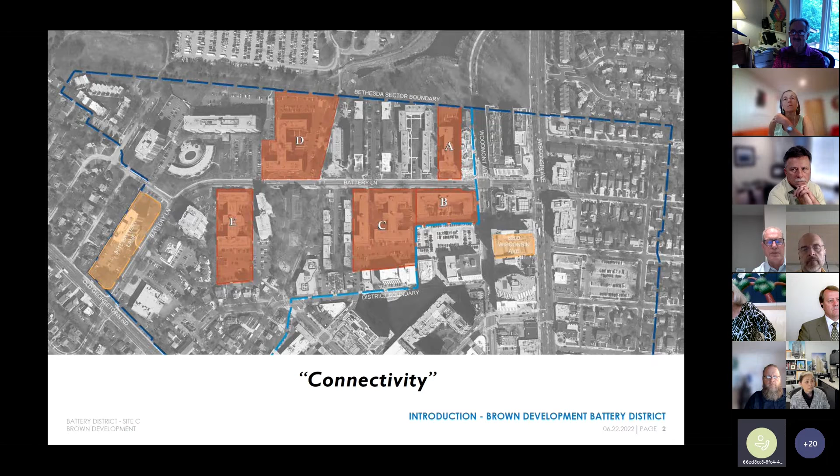In our sketch plan, as Grace said, we really focused on strengthening the residential character of the neighborhood, looking at the unifying elements being Battery Lane and the trolley trail, and looking to improve connectivity. When I say connectivity, it's certainly physical connectivity—accessibility and mobility, improving pedestrian safety and the pedestrian experience, and providing a two-way cycle track separated from vehicle traffic on Battery Lane all the way from Woodmont to Old Georgetown. So physical connectivity, very important.

Social connectivity is just as important. None of our buildings today have any facilities for meetings, social interaction, or recreation. So as you'll see in our site plan, we propose to remedy that with a lot of facilities and spaces, both interior and exterior, to encourage social interaction.

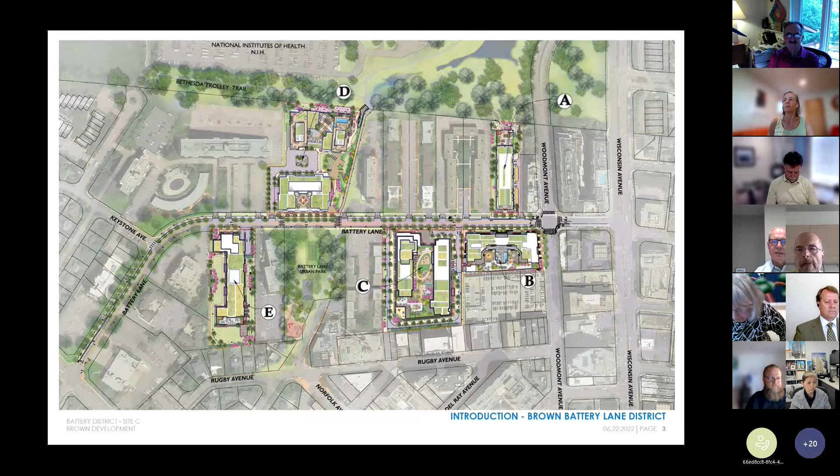And finally, environmental connectivity is very important. We want to provide stormwater management, energy-efficient buildings, and significant tree canopy, all to provide for environmental connectivity in the Battery Lane neighborhood. So with that, I'll just go through the next image.

Just quickly, some changes and updates. The sketch plan to the left had several curb cuts from Battery Lane. We've consolidated those into just one curb cut, again improving the pedestrian and bike user experience on Battery Lane. We really tried to remove what was a ring road—the amount of asphalt that encircled the site—and replace it with green and tree landscaping. Our design team will get into that in some detail. So all of that, we think, really helped improve the site.

And then there are some changes in massing, which will be described by our architecture team, which also, I think, are significant improvements. All right, next slide.

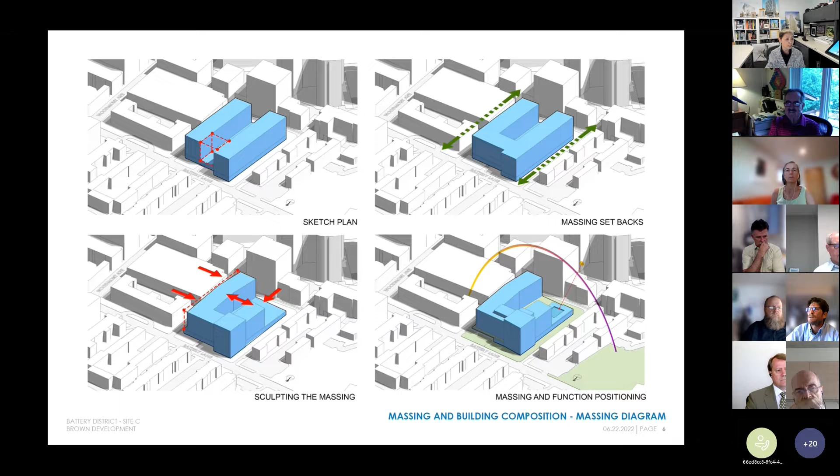In addition, it allows us to provide residential amenity outdoor space for the residential building and also for the neighbors, because we set back typically on all sides. We've really been able to do that successfully with this project. Next slide, please, Bob.

So this slide shows that at 120 feet tall, building C is our building. We are compatible with our neighbors when they develop in the future, as they will also have a similar allowable height of 120 feet. So you can see we fit pretty well within the neighborhood.

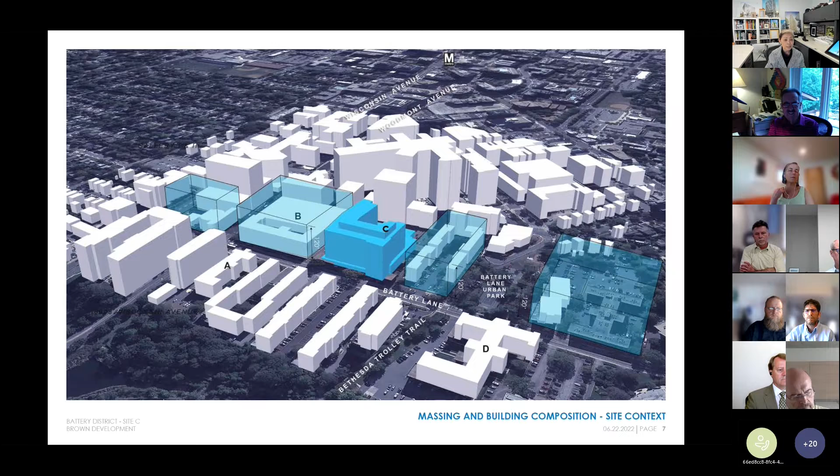And for the next slide, I'm going to pass this along to Trini, who will be discussing the landscape and urban design aspect of the project. Good morning, everyone. Trini Rodriguez from Parker Rodriguez.

I think both Doug and CT have described the major moves of how this project has evolved, which we think has really improved the public realm and the relationship to the context. You've seen this slide before, but I want to highlight the importance of the streetscape improvements we're incorporating as part of that frontage. It's very important how the building relates to that streetscape, how it fits within the context.

I think you all know we've been working with staff, especially to move the drop-off that used to be in the front to the side. We still want that because it's activity that's part of that energizing element in the streetscape—you can see it from the street, but it becomes more of a plaza space that engages both the sidewalk and the interior.

Along that frontage, you'll see in a minute how we're treating that more as a front porch, an extension of the building, engaging the streetscape and providing a lot of porosity internally into the site—views internally into a courtyard that engages both the residents and the passerby.

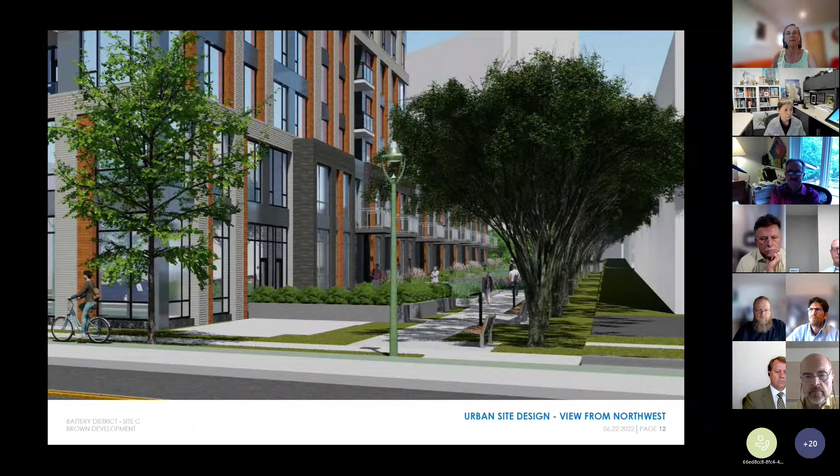Next, we have a close-up on the next slide. Yes, so this shows the building stepping out, the access to the two-level units. You can see that, and then we're providing this walkway with seating, lighting, and trees and plantings to make it a lush experience.

So this will connect straight north into Battery. And if you turn left, that goes around the building, and you'll see on the next slide how we're creating a special node in this space with an open green lawn for casual play. You can see how this engages with the building.

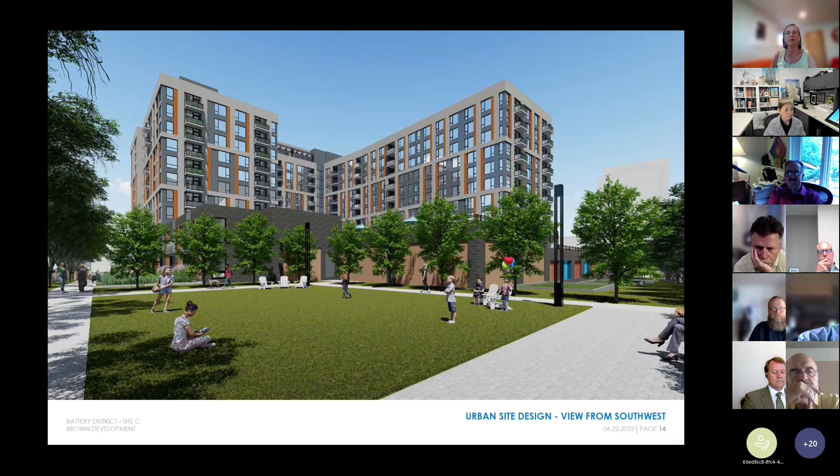So the second level courtyard that I mentioned before has a lot of exposure to this rear end, so you'll have a lot of eyes into this back area. This is the node that I mentioned before. If you move to the right, going east, this will connect to the eastern pedestrian connection. It'll be lit and has a number of units and activities facing it, making it safer and activated.

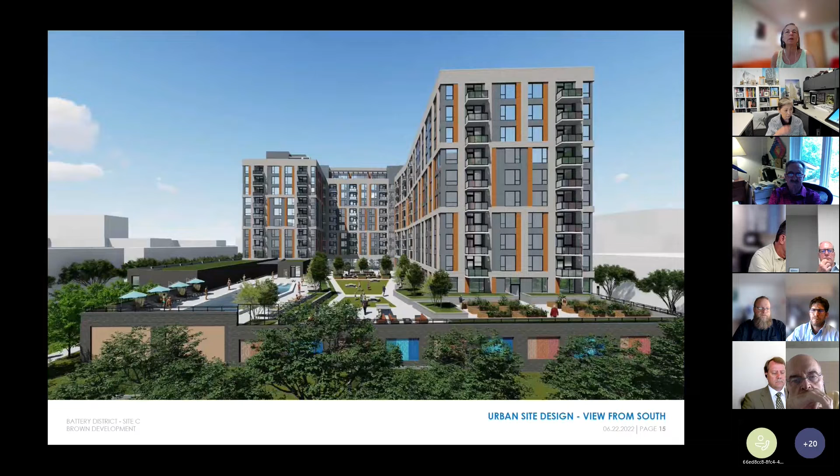Next. So this is a view a little higher up showing the private courtyard. Again, these will provide amenities for the residents. These are private, but this is a building that will have a very extensive offering of amenities, between the pool that you can see on the left-hand side that overlooks that green area and the pedestrian loop.

We also have a central area with green. There is grilling, there's games. There is also, to the right-hand side, a vegetable garden and a variety of seating. You can see how the massing of the building stepping back on the left-hand side creates the opening and the stepping of the units, which CT will explain more, but to the left side you'll see the units coming up, and then the larger volume on the right.

So now I'm going to take you to the other corner. This is the eastern corner, the pedestrian connector on the right-hand side will take you all the way up and then to the north on Battery to connect to Battery. On the south along the police station, there is an existing sidewalk. So this connects exactly at that point, and it provides an immediate connection into the Rugby Avenue district, again sort of a city node.

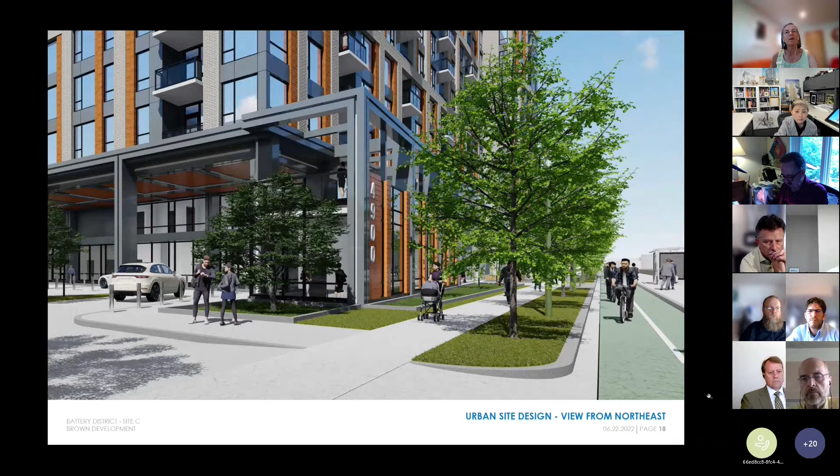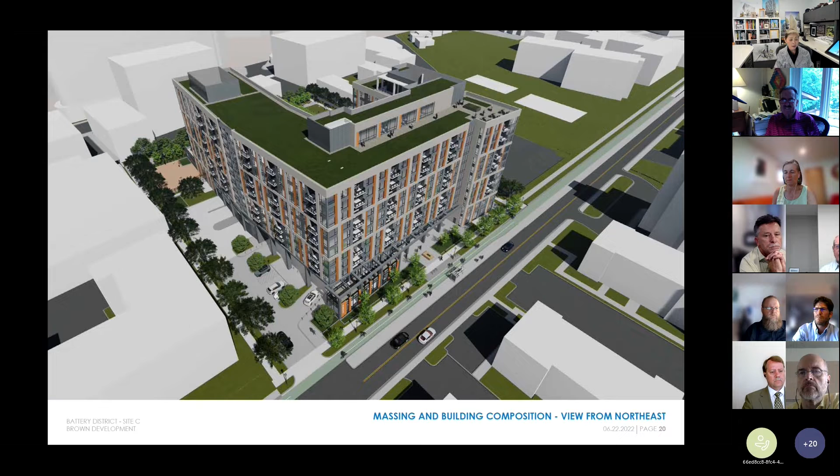This is the view looking from the northeast corner of the site, and you can see the curb cut from Battery Lane, the single curb cut entering the site, and how we tuck the vehicular drop-off area under the building off this driveway. The driveway continues south to access our loading and parking garages. You can also see the vocabulary we treat going around the building, because there's no real rear elevation to this building, so we apply the same treatment consistently throughout the building massing.

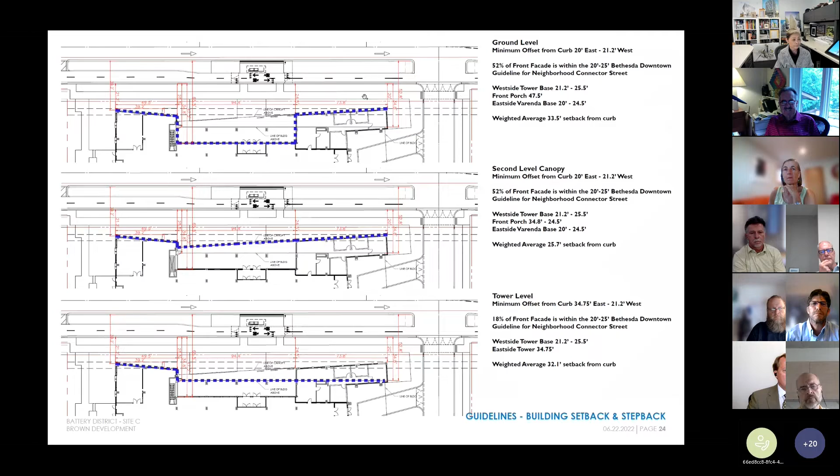For the record, Bob Graham with Rogers Consulting.

As City said, the setbacks are kind of unusual. As Trini described, we have a recessed 2-story lobby. So when we look at the placement of the building, we have a 21-foot setback at the western corner, a 20-foot setback at the eastern corner, and a 2-story recessed entry lobby, which is actually set back 47.5 feet from the cycle track curb, or approximately 65.5 feet from the vehicular curb.

This results in about 52% of the building's front facade at the ground floor and second level being within the 20 to 25 foot Bethesda build-to area. The average weighted setback for that 2-story space is about 33.5 feet from the curb on average.

As we move up to the second floor canopy or third floor plate, we again maintain that 52% being within the 20 to 25 foot build-to area. As described, our canopy recesses back from the main tower above, 17 feet on the east, transitioning down to 7 feet on the western portion, and the tower element maintains its plane throughout. This yields an average weighted setback of about 25.5, 26 feet on that plane.

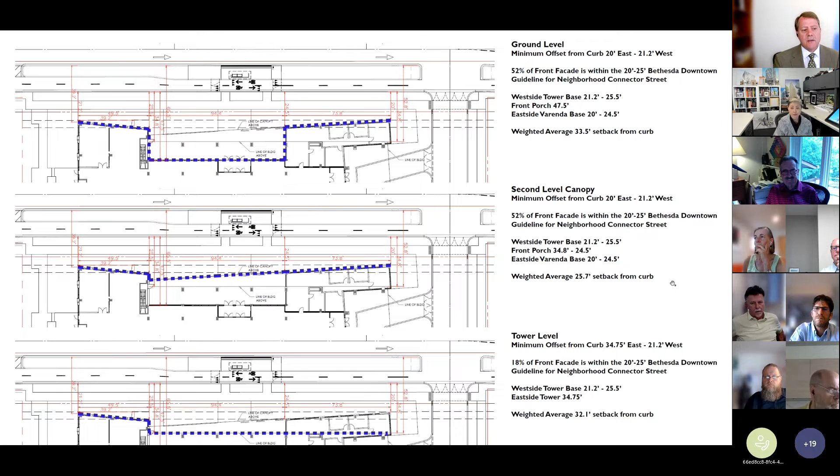When we move into the tower above, starting at level 3, we again maintain our iconic tower element at 21 feet. However, the main body of the tower is set back 34.75 feet from the cycle track curb, or 52.8 feet back from the vehicular curb. This gives us a weighted average of about 32.1 feet running across those spaces.

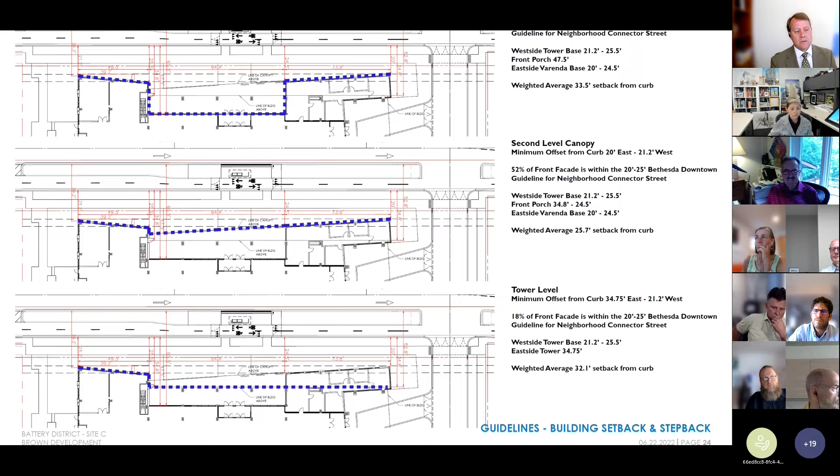Okay, back to City. Thank you.

Let's talk about the base building placement. What we've done for this project is create the interior and exterior function spaces and the facade to create an activated street wall along Battery Lane. We accommodate a lounge area at the building front porch, and we also incorporate a veranda on the second floor as part of the base building design. The base building scale and design in tandem with the landscape design really elevate the pedestrian experience along Battery Lane.

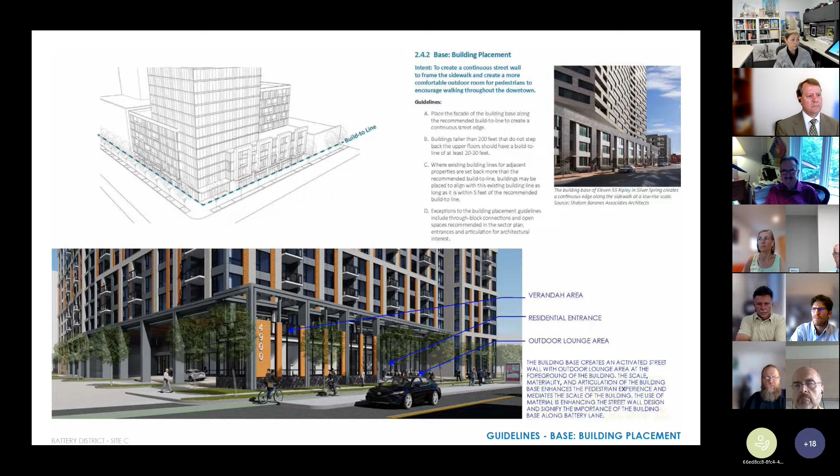To continue our street activation, this slide shows the architectural elements we are incorporating with the building design. We are providing a varied landscape design and furnishing, and the building base is designed in tandem with the landscape design, so it's responding to each other. We also incorporate an outdoor veranda for people to hang out on the second floor, which really creates a lot of energy and excitement on the building facade.

In addition, we have a metal trellis on top to really define the building base. The glass wall you've seen earlier creates transparency for the lobby, encouraging visual interaction from the sidewalk into the lobby. The balconies on the tower, with multiple layers of building material throughout the facade, ensure activation of the building base and facade along Battery Lane.

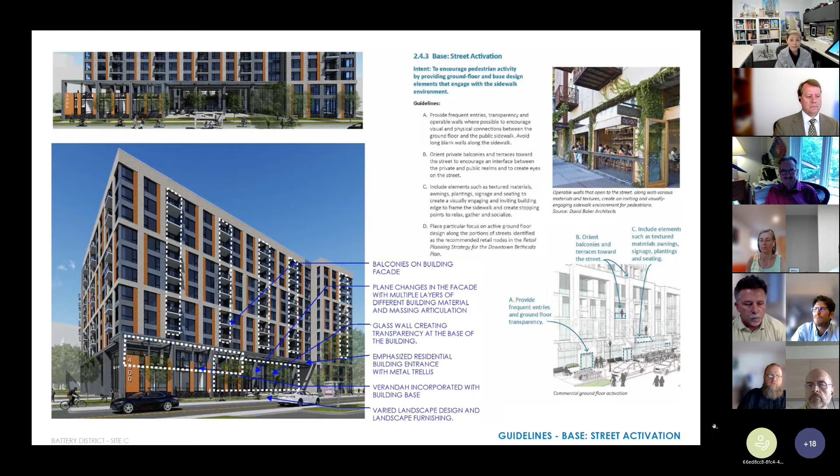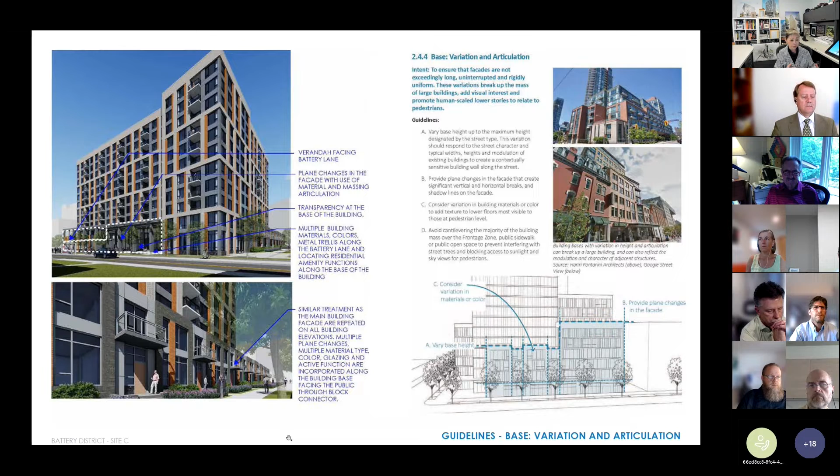All the features discussed under building placement and Battery Lane activation are also consistent with the building base variation and articulation, which doesn't stop at Battery Lane. We bring this to the west and east of the facade and also behind the building. If you look at the slide at the bottom left-hand corner, it shows the two-story apartment articulation and how the variation from the rest of the building elevation is brought in here, allowing activation and making the pedestrian experience at the through-block connection a bit more energized and interesting.

For corner treatment, we are emphasizing the northwest corner of the site with special corner treatment to the massing, where we bump out the massing a little and angle it slightly with vertical design expression. What this does is tie all the design elements together and anchor the building to the ground.

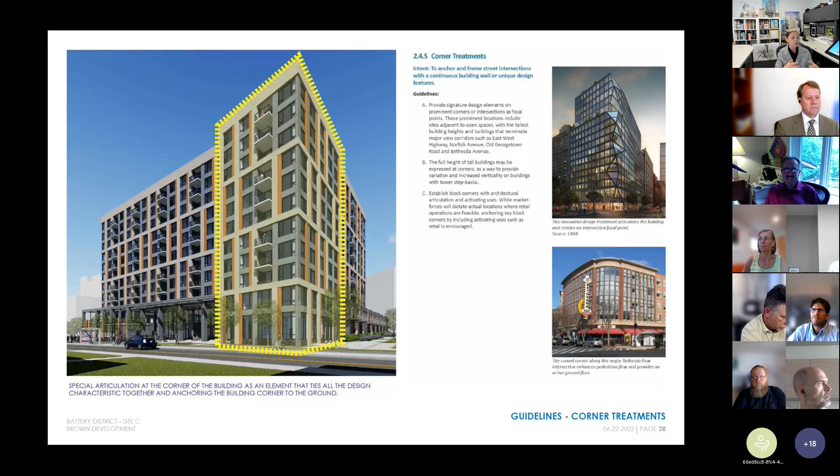We already spoke about this earlier, about how our building steps back significantly from the neighborhood to allow these amenity spaces on the south of the building, and also how we step back at the base of the building along Battery Lane.

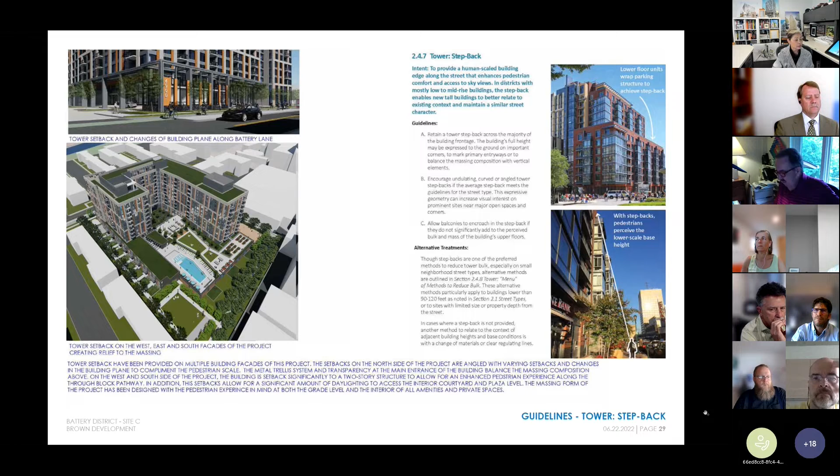In terms of compatibility, we are compatible with the neighboring building, as it's an important concept for successful integration with existing context. We are compatible in terms of using the same building materiality, color palette, and texture. If you look at our building design, we have a very similar composition of facade treatment, with larger glazing at the base of the building to allow this visual connection to the pedestrian. This is also most characteristic of the building that WDG has done at the Battery Lane area.

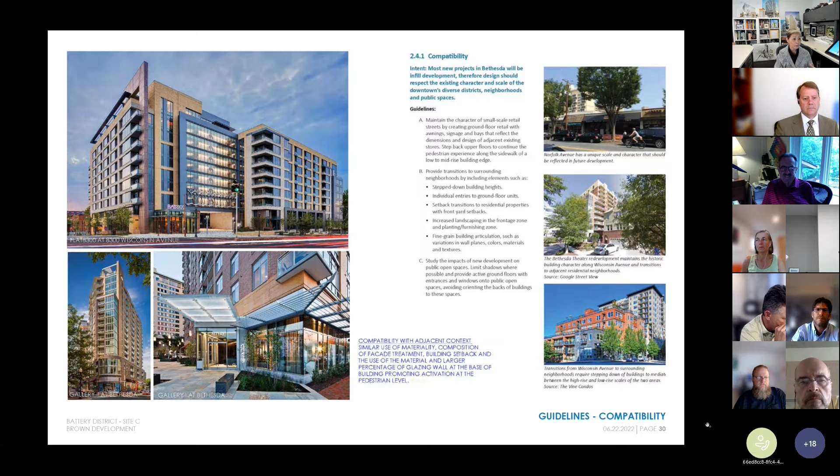This slide shows our building providing a transition with the surrounding neighbors by stepping down on all sides.

So the purple color, for instance, is where we locate the two-level apartment, and that will have the individual entry into the through-block connection.

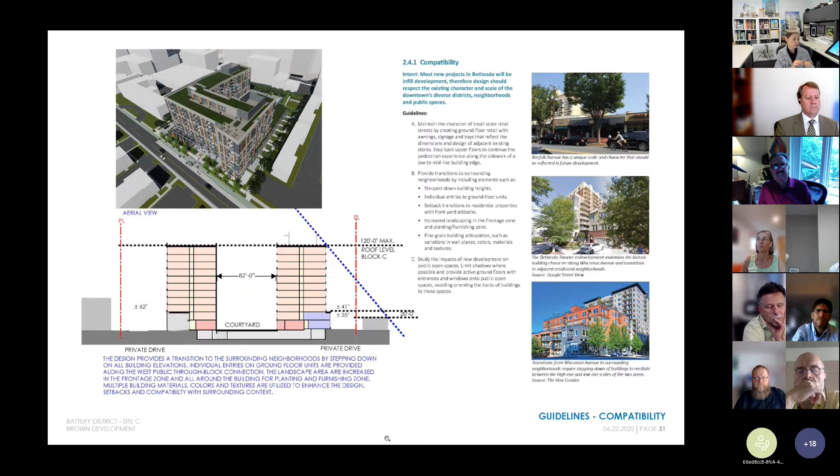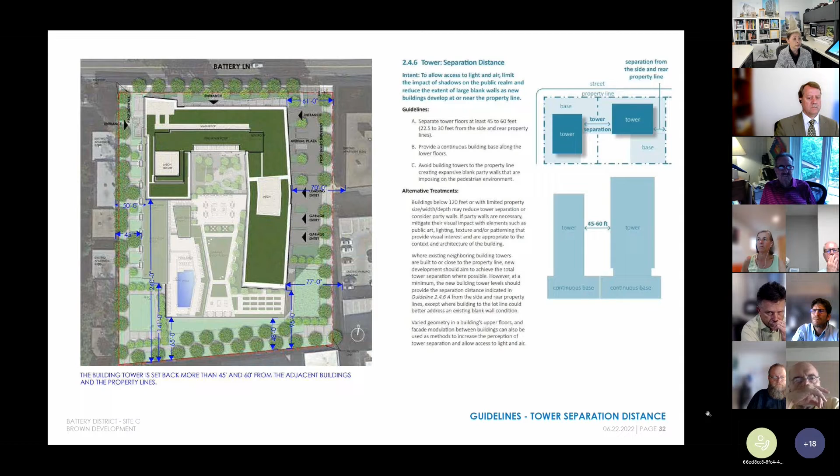Tower separation distances - I think we satisfy this requirement. We exceeded the minimum requirement of 45 to 60 feet. In fact, we provide more significant setback for tower separation distances: 61 feet in front from a property line, at the back a minimum of 48 feet, and at the side about 45 feet minimum.

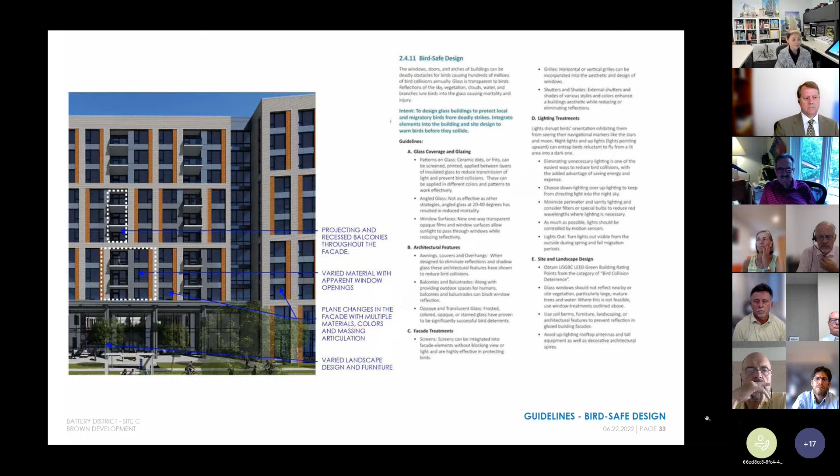For our final slide of the building, I want to walk you through the ground floor plan to emphasize what we are doing to create an interesting base experience along Battery Lane. If you look to the east of the site from the shared driveway, we tuck the vehicle drop-off area into the building, so it's hidden from the pedestrian.

If you're walking up and down Battery Lane on the sidewalk and stop in front of the building, you'll see a transition area with an outdoor porch. You can see the transparency of the glass two-story lobby volume from inside, which really energizes the building. What's unique about this design is our ability to bring the courtyard down to the same level as the lobby, so even standing in Battery Lane, you can see through those transparent glass walls to the greenery we're providing.

And because the podium is pretty low, you can actually see past above it to all the residential amenity we're programming on top of the building parking podium. We're also putting energized residential amenity along Battery Lane and around the facade, with residential units on the west engaging with the through-block connector. This means the space will be used, lit, and people will be hanging out and having fun there.

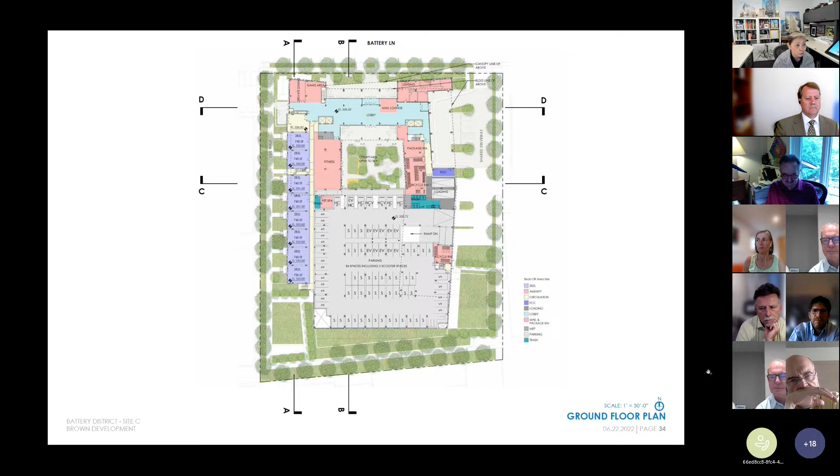That provides the physical and visual connection to Battery Lane and really makes this building part of the whole picture, where we're trying to create connectivity to the neighborhood, to the community, and to the master plan. So with that, I'm going to pass it along to Doug to conclude our presentation, and thank you for having us today.

Yes, this is Doug Wren. Thank you for your patience in hearing our story. I hope you'll agree that we've really tried very hard to achieve our overall vision for Battery Lane. We want to strengthen the residential character of this neighborhood, provide free connectivity, and contribute to the overall quality of the experience of being on Battery Lane. With that, I'll close, and we are eager to hear your comments and questions. Thank you.

This is Chow Joy. I think overall the site plan has a lot of improvement compared to the previous version. There's strong connectivity throughout the site, and the layout and geometry design is great. I do have a couple questions regarding the northwest corner - there are two patio areas that somewhat interrupt the green panel along the sidewalk. Can you explain what those pavements are for? Is it for outdoor retail spaces?

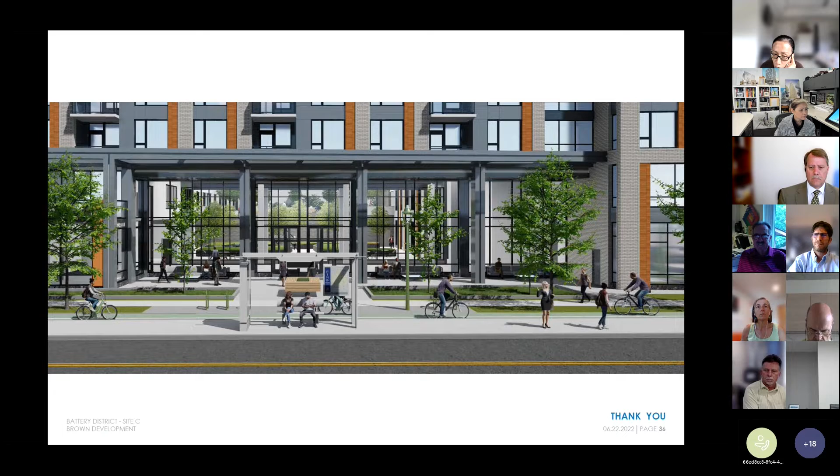If you go to the site plan - yeah, at the top there are two pavement areas. Is that a way to create a continuous green panel to have more trees planted in this area, to have something even stronger? Unfortunately, the two gray areas you see here and here are actually utility services, electric services for the building. There is an engaging patio off the lobby that engages the building and provides entry from the west side as well.

So is that a way to shift that utility pavement area or space elsewhere so that we have a continuous green panel along Battery Lane? Because right now it looks quite nice along the entry. We can certainly work with the utility companies to see what we can do. Okay.

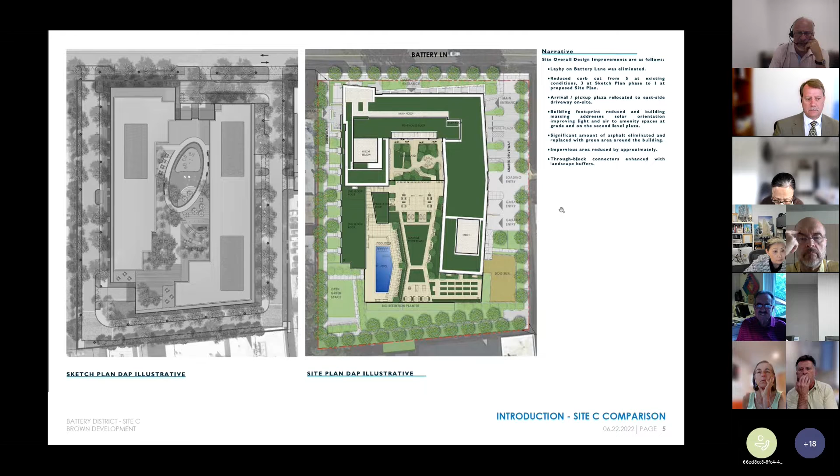I have some site comments and building comments, so I don't know which you want to go through first. We're on the site, it seems. One question I have - this is Paul Mortensen, by the way - on several of your drawings, I think page 23 was one of them.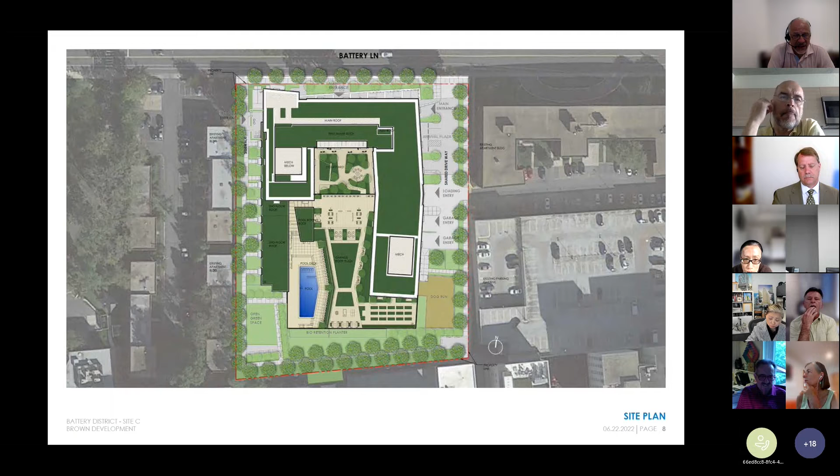It shows the cycle track, and then a planting strip. Is it this one? Yeah, there it is. So it shows the cycle track, it shows a planting strip, it shows the sidewalk, a planting strip, a cycle track, and then another sidewalk.

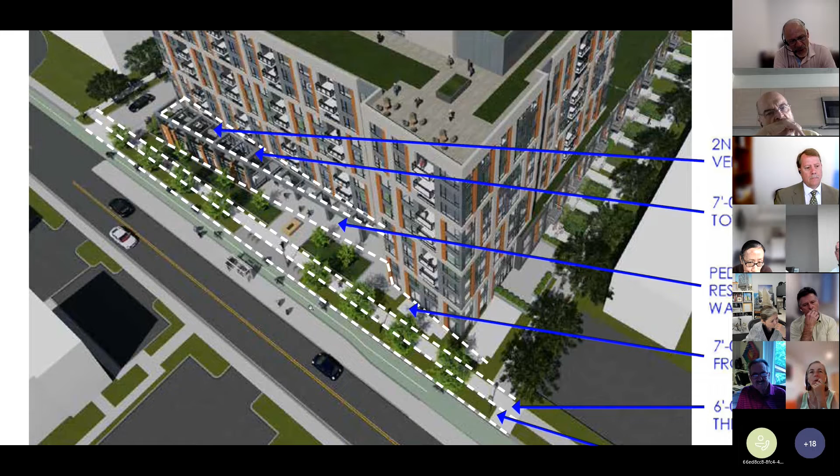There will be a hardened median in between the vehicular travel way and the cycle track in front of the building, and that will end at the property line. Beyond that will be striping. We're working with DOT, or attempting to work with DOT, on what the materiality of that hardened median will be. Obviously, within the bus stop area, it will be a hard concrete surface. Beyond that, we're attempting to get the ability to do grass or low-level planting, something to soften it further.

We're very limited on what we can plant in that area due to sight lines, but also due to utilities that happen to be underground in this part of Battery Lane. Ideally, it would be nice to have trees between the cars and the bikes to give a little more protection and shade, and to make the street look narrower so cars drive slower. We would love that, but there are water lines and electric lines within that zone that prohibit us from putting trees in there.

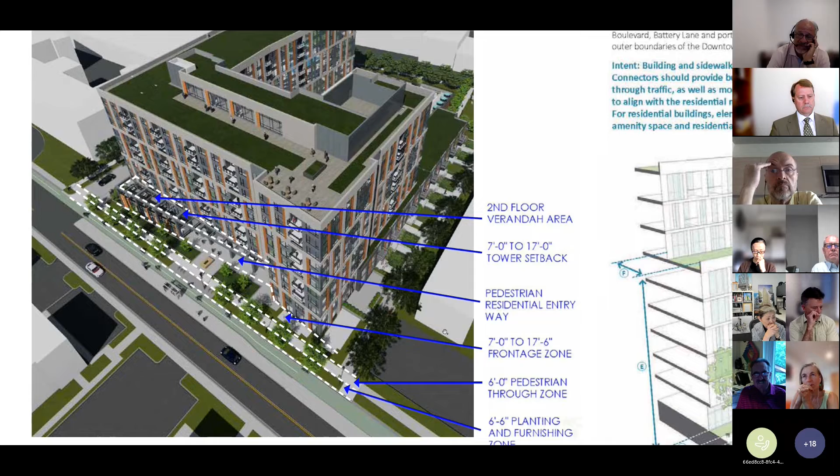So we have not - these were going to be kind of private community gardens, so we have them at that level. Down at this level, we wanted to have something that would still feel very public, that felt like the building was internalizing some of those uses. So for now, that's where we have them, up at the top.

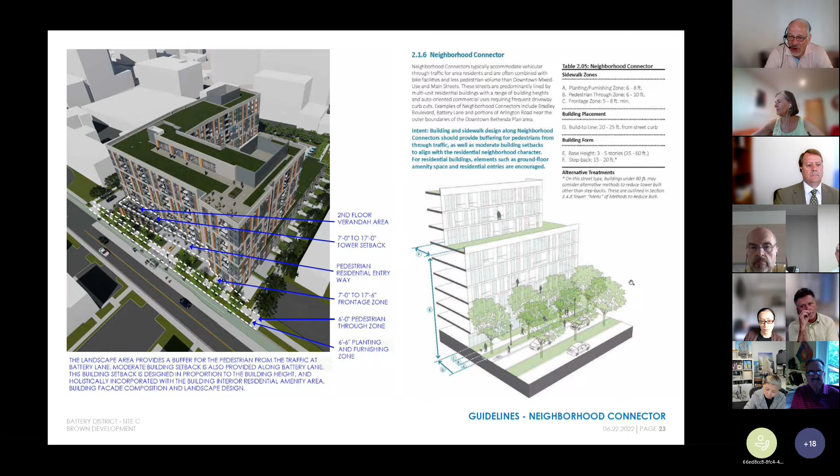Yeah, the reason I'm asking is I'm very concerned that the back of this building has just been sort of left for, unfortunately, probably people you don't want back there, for all sorts of stuff I think can happen in that back because there's no activity back there. And not only that, but it's a blank wall - the entire width of the building facing that back.

I think this is something, and this is like a bigger discussion, for this side of Battery Lane, because the lots are so deep. There's no alley back there. On the north side of Battery Lane, on the back, we're putting in a public pathway that goes the entire length - that starts to link all these buildings and create kind of an energy back there, so people are going to be back there and things are happening.

On this side of Battery Lane, I don't see what's going on in the back, and I think it's going to cause a problem here, and it's going to cause a problem when you go further west on the next building in a later phase. It's going to be the same problem - a back without any activity or use, any openings that give some sense of eyes on the street or eyes on the park, just to secure it. So I'm trying to figure out what you're going to do back there, because I don't see anything ever happening except the wrong types of things.

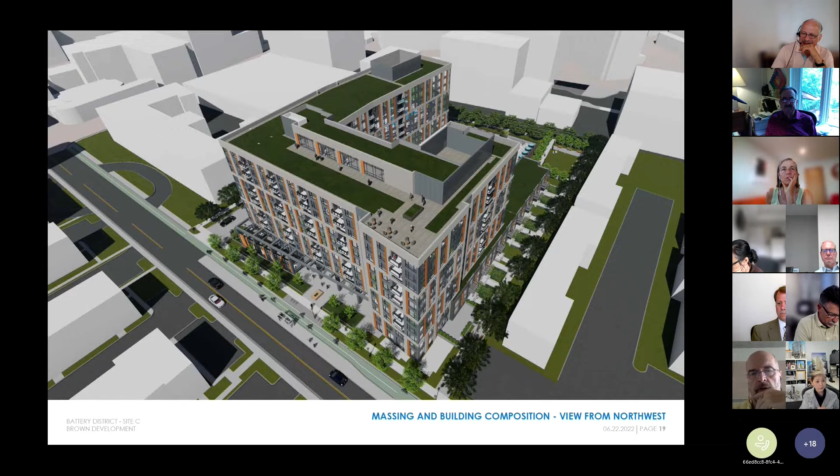So to answer that question, we did look into incorporating something at that part of the building, but what we've done here is create an outdoor area, and we don't want to block the view because the view to the north is pretty spectacular. So we wanted to focus and use that area as an outdoor sitting space for people to hang out. We tried different things, like putting in a trellis and stuff, but at the end of the day it looked tacky and like an afterthought. So we decided that by not having it at all, it gives a nice cap and top to the building, so it blends into the sky. Just repositioning the massing at the corner itself allows us to articulate that corner.

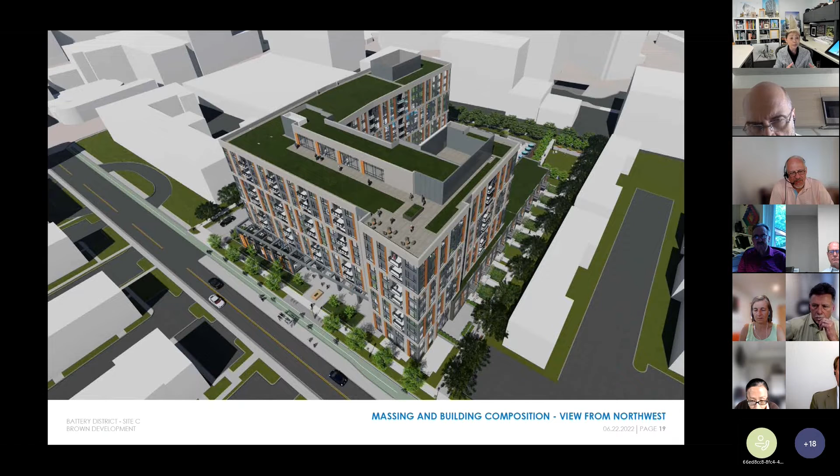Maybe we can start looking about doing different penetration. I mean, we can continue developing that if you want, but we have all this building articulation and characteristics that tie this together, and we want the building to be grounded to the ground.

So the reason why we don't have that attachment on top of the building is because, like I said, we looked at it, it just doesn't look too pleasant.

One thing that struck me, Paul, moving from the top of the building down to the base, is there seems to be a lot of different languages for how this building grounds. I'm wondering if there's some way to conceptually thread the languages together so that the building really meets the ground, maybe with only one or two variations on how it does that.

It just seems that there's frame, there's dark brick cladding, there's the language of the tower piece that comes down to the ground. There seems to be a lot of different ways in which the building is grounding, and I'm thinking something that's more of a belt. Maybe there's a way to transition that frame piece along Battery Lane on the more eastern part of that northern facade into some transformation that becomes the language of the townhouse fronts—a language that wraps around the building and modulates it.

The other thing I want to say is that the site plan, which is one of our requirements, the roof plan doesn't do your building justice. I think your building is much easier to understand as a Nolli plan, from the street level experience.

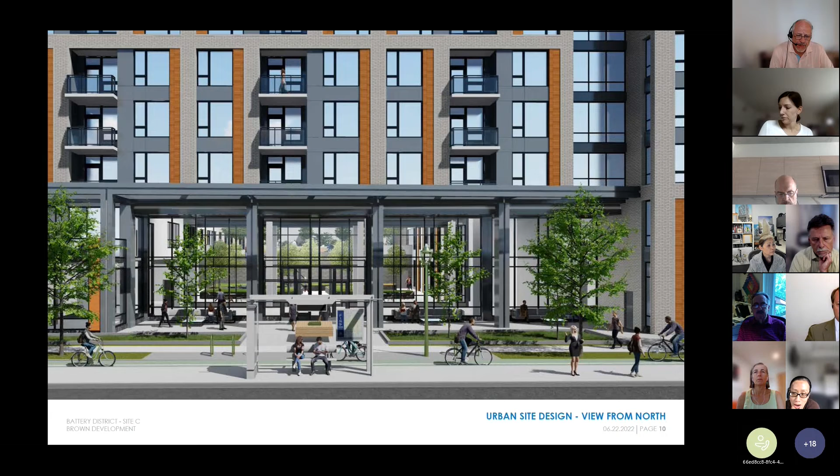Do you have the elevation of the townhouses? We have a perspective view of it. If you—there, that's another one. Yeah, that's there, more—oh, close that up. Good, that's good.

So Brian, you're suggesting that maybe this gets incorporated more into that arcade part, or the part on the eastern end of the front elevation? Yeah Paul, I don't know if it's exactly this, but there's this—yeah.

I think there's 3 or 4 different base strategies for the building. One is a frame strategy. One is this surround with the dark colored brick. One is that the 3-story motif comes down and hammers its way into the ground, and then on the back of the building, yet another motif for that. I just wonder if there's some more continuity that could be developed—there could be play between wall surface and frame that would allow that frame to emerge out of some consistent material of a wall surface. So I don't know what the answer is. Right, that's why being a critic is so easy, right?

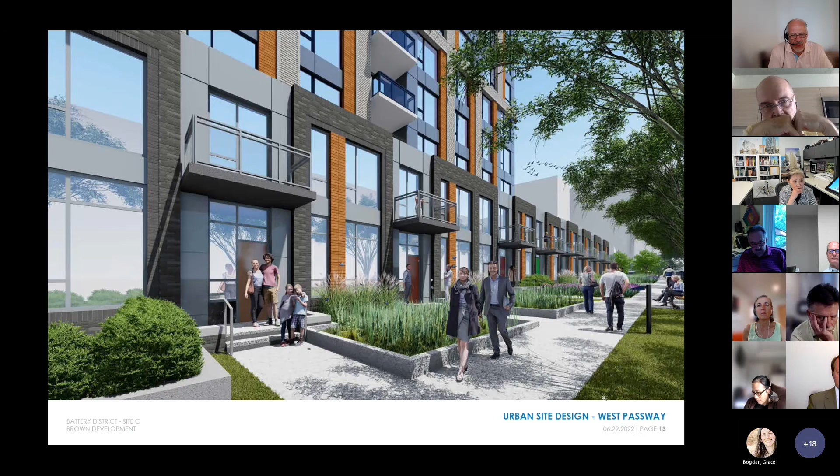Well, I totally agree. I think the one perspective, if you go back a couple of that one - if there's something that can heighten that corner mass a little bit at the sky, I just think it would be helpful.

I concur. And it might be that maybe those top windows are a little bit taller, or there's a band so that the cornice is a little thinner. I don't know what the answer is, but I think you've made an iconic form, so it should be expressed a little bit more as an iconic element, rather than just being the same as the other two sides.

Sure, we'll look at it. Okay.

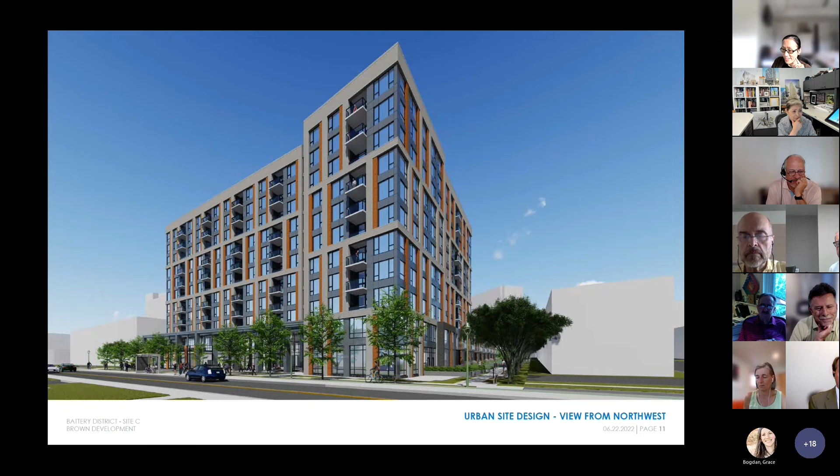One more question I have: the light poles are intentionally rendered green, or are you going to design it to green? The light poles will be subject to DOT, so they're just rendered here to continue the pattern.

Okay, I thought there was a consistent color palette for the streetscape. It looks nice though, I like it.

I think that might be it, Grace. Okay, then.

So I have 4 members signed up to speak. I will list them all in the order I was given: Holly Clemens, Anita Kramer, Dina Solomon, and Michael Fechko. Holly, are you here?

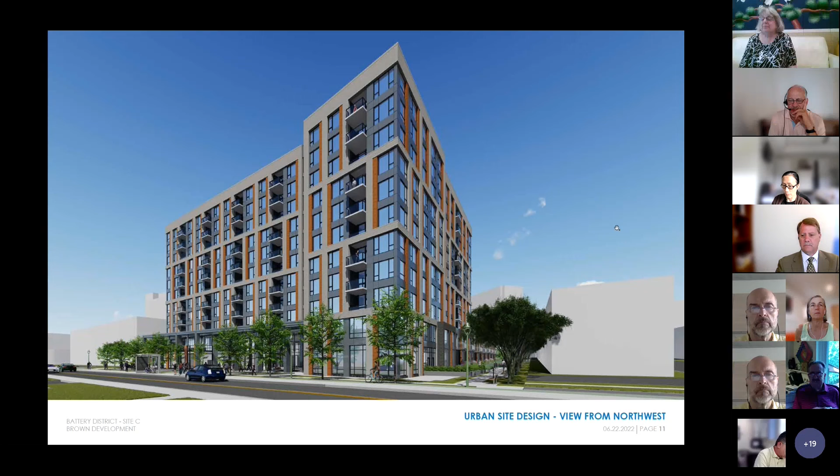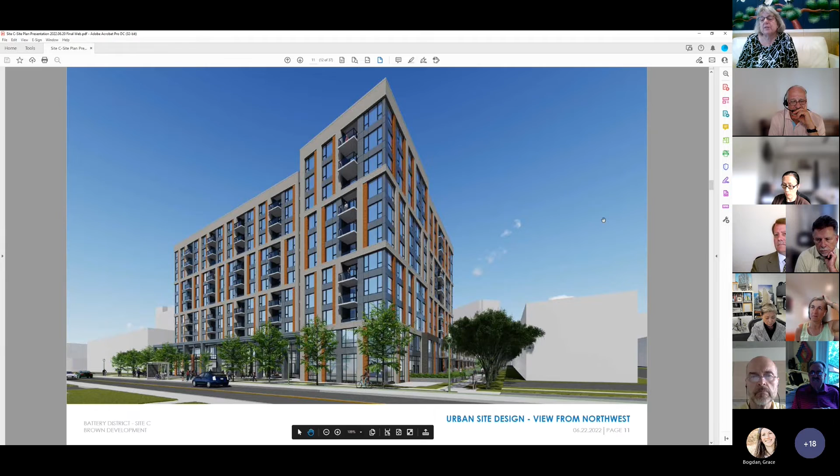Yes, I am. Hi. I can hear you, yes? Okay. Thank you for your presentation, with the promise of neighborhood connectivity but not connectivity yet, for the double protected bike lanes, the glass visibility, and the affordable housing units through the MPDUs.

I see adequate setback on only 3 sides of this building. The problem for me is the too-small setback from Battery Lane. The current building is set back almost 40 feet, and you were talking about 17, 20, or 25 feet - almost half of what we experience as pedestrians walking on the sidewalk.

So I feel that the proposed building is not in step with other buildings on our block for larger Battery Lane setbacks. For example, the recently renovated Sunrise building has a setback from Battery Lane of 58 feet. I don't consider that excessive.

I feel that Alden must not erase our garden residential character that we experience when we walk down Battery Lane. I'm thinking that Site C could take some of that 35% open green space, especially in back, and reassign it to the front to get the proper residential setback. This would also be beneficial to the neighborhood rather than hiding it in the back, and perhaps help with your safety issue.

I think the project's proposed goal in the beginning was to move Battery Lane from car-focused to pedestrian-focused. I think you need to really think about the real pedestrian focus, especially as you're walking in front of the building on Battery Lane - the southwest corner, any of it, is just too close to Battery Lane.